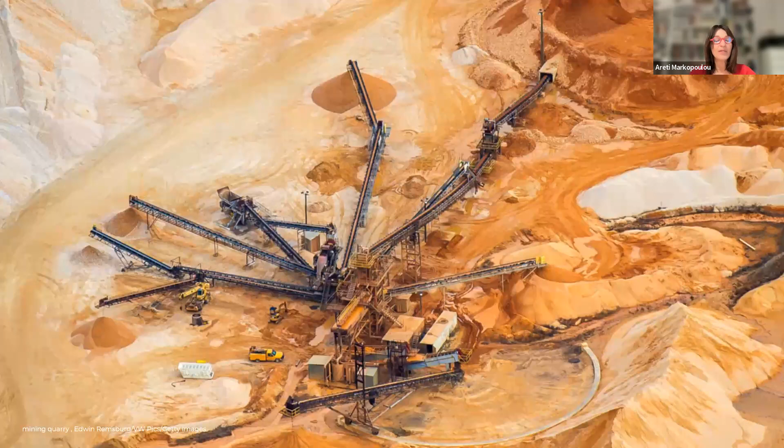Buildings are responsible for half of the global primary material consumption, while they're accountable for almost 40% of global climate emissions, of which half are produced during construction. So although our contemporary practices and policies primarily focus on optimum sustainable buildings that are low in energy consumption and low in CO2 emissions during their operation, we start to realize that the biggest challenge lies in decreasing the embodied carbon of the building industry.

Just to clarify some concepts and relate them with the types of carbon in buildings and the environmental impact, it's important to mention that embodied carbon is the carbon dioxide emissions associated with materials and construction processes throughout the whole life cycle of a building or infrastructure. It includes any CO2 created during the manufacturing of building materials—material extraction, transport to manufacturer, manufacturing—plus transport of materials to the job site and construction practices used. Put simply, embodied carbon is the carbon footprint of a building before it becomes operational, and it also refers to the CO2 produced maintaining the building and eventually demolishing it, transporting the waste, and recycling it.

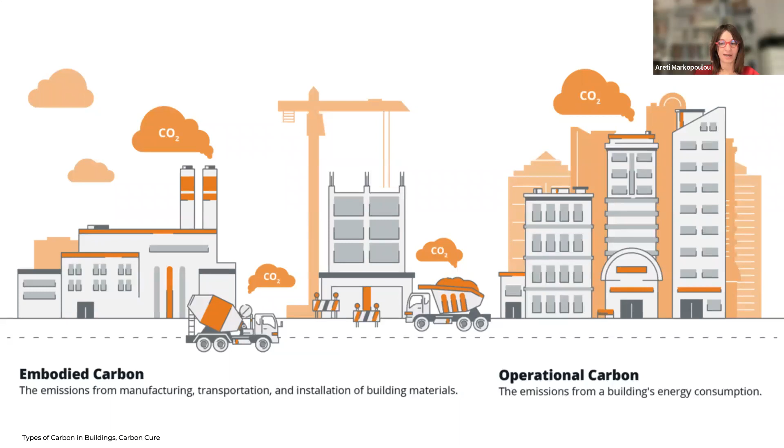Recent data from the World Green Building Council indicates that embodied carbon is becoming a larger portion of a building's overall carbon footprint. If you're interested, you can find more detailed data in the Advancing Net Zero project, a report produced in partnership with the European Climate Foundation, C40 Cities, and Ramboll. The report focuses on embodied carbon and emissions as part of a whole life cycle approach, and through its results it urges systemic changes needed to achieve full decarbonization across the global building sector.

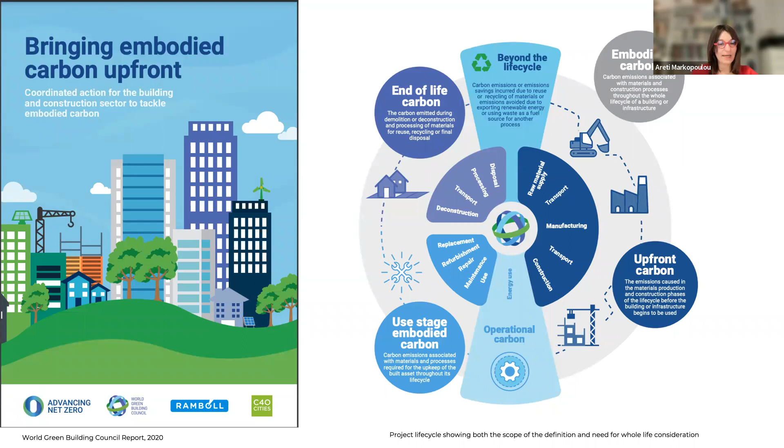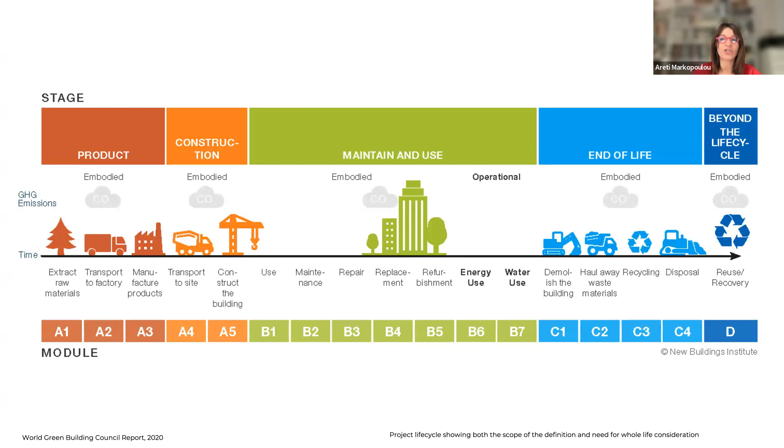Although the increasing need for buildings to accommodate population growth is a fact accepted by every government, industry, and stakeholder, there are still no industry standards, no building certification programs, no public policies or building codes, and no widely used, transparent, publicly available methods or tools for measuring embodied carbon. So key point number one: embodied carbon emissions associated with the production of building materials, construction activities, and end of life—shown here as the orange and blue part of the diagram—become the biggest challenge to respond to, compared to operational carbon during the life of the building.

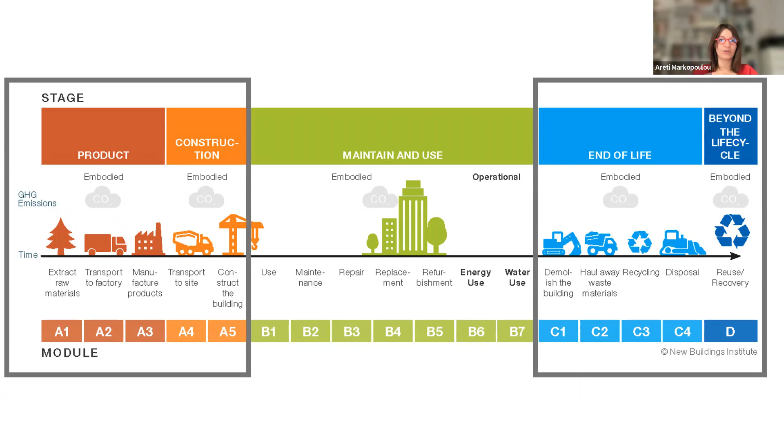A second significant key point to highlight, to contextualize what we'll be discussing today, is the impact of resource extraction that goes beyond carbon numbers. We are gobbling up the Earth's resources at an unsustainable rate. The extraction and processing of materials, fuels, and food contribute over 90% of biodiversity loss and water stress.

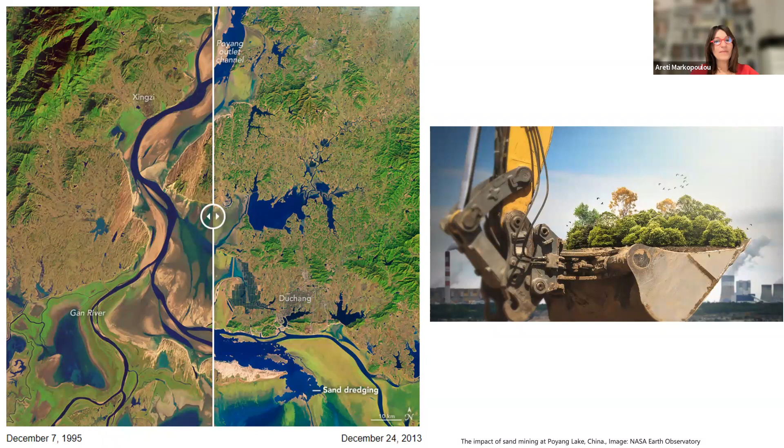This mass includes, of course, waste, and we should not forget that the building sector is one of the world's largest waste generators. Construction and demolition waste accounts for approximately 30% of all waste generated in the EU, and similar numbers are valid in other parts of the world.

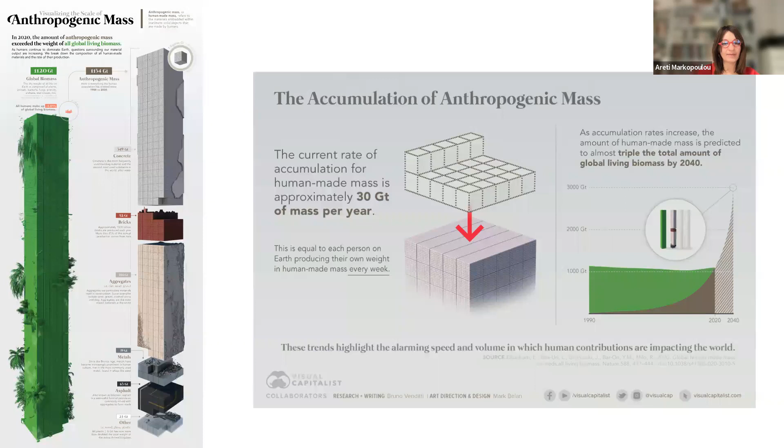So on one hand, we need to build more to respond to the current challenges of population growth—we actually reached 8 billion people just 10 days ago. On the other hand, we need to build in a way that minimizes embodied carbon and limits material extraction. So how do we do that?

It is exactly in this point that the need of rethinking resources should enter our education, should enter our design culture and our policy making for the built environment. So in our current context of hypergrowth, coupled with the climate emergency, the growing rate of urbanization and the increasing social and even political awareness on the matters of the Anthropocene, the topics of resource depletion or insufficiency need to be reframed. A proposal related to our work that we're developing at IAAC in Barcelona is to operate with an abundance mindset rather than from a place of scarcity. So this is a new paradigm that I want to introduce.

It's especially relevant in the practices related to the design and the production of the built environment, since it expands the definition of resources and, of course, where resources, raw and non-raw materials can be found, and where these raw and non-raw materials can be mined. So if, as agents involved in the design, in the planning and the construction process, we could shift the attention to the anthroposphere as a source of, rather than just a destination for processed goods, then we might have the potential to disrupt linear patterns of design and enhance circularity in cities and the built environment.

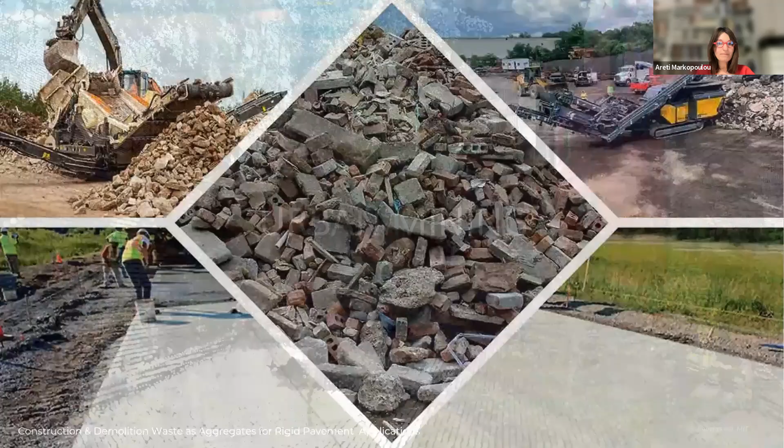Now, current urban mining practices and policies for construction are primarily focusing on reusing construction and demolition waste by downcycling them. So the majority of demolition waste, for instance, is used as filler when building roadways, and this downcycling prevents the further reuse or the further recycling of matter.

There is also very little research on how construction and demolition waste can be reused as primary materials in new building construction. And this is due to the lack of building information on the amount, on the state, on the reuse possibility of the existing building material stock.

So the current urban mining initiatives for building materials and components reuse rely mainly on expert survey and analysis of field data in conjunction with other relevant census or cadastral data sources from public building registers.

However, on the one hand, public building data lack key information on materials, and on the other, the need for extensive prior field research results in a process that requires high cost and sophisticated equipment, making it difficult to implement in low budgeted administrations or in countries where extensive public open data is not available. So developing quick, feasible, and replicable methods to create inventory of existing building stock reuse through automating the expert field audit and the inspections is a key research field that requires further exploration.

Here I want to showcase two projects that operate in two different scales for monitoring and automating the indexing of material stock in the built environment. So the projects are complementary and they provide useful insights on the potential of the use of technologies such as artificial intelligence, computer vision, 3D scanning, and robotics for enhancing data sets on the existing building material stock.

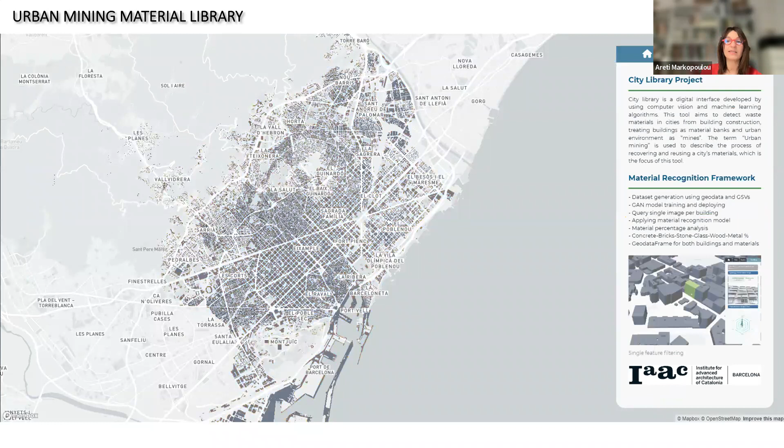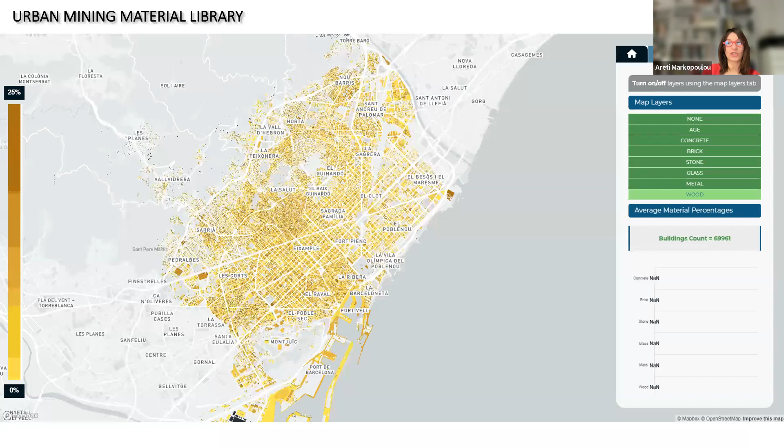Starting with the urban scale, this is a project called Urban Mining Material Library. It has been developed with a group of students and researchers in the City and Technology program at IAAC. The project proposes an end-to-end process for an integrated web-based application which encloses and delivers cross-referenced data about a city's material stock.

The process consists in combining image-based segmentation with cadastral data in a GIS database. It uses unstructured data from open street view imagery to identify relevant patterns for making estimations of the quantity, state, and projected availability cycle of concrete, brick, stone, metal, timber, and glass in building facades.

We use computer vision and machine learning to train an algorithm that, using millions of open access images, can create a platform allowing us to identify what kind of materials we can find in the buildings in our cities.

By applying predictive modeling at the city scale, the algorithm is able to identify, geolocate, and even quantify facade materials with a present accuracy of approximately 87%.

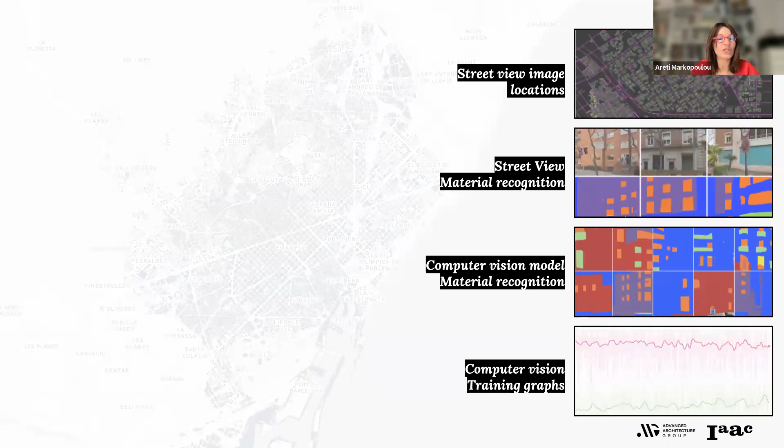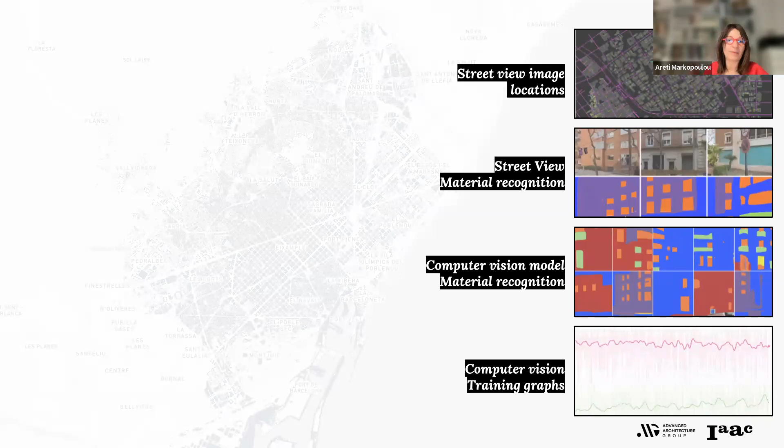The value of this study does not lie in achieving 100% accuracy. It actually lies in the use of open and unstructured data as a basis, and this use of unstructured data makes the platform highly repeatable and expandable. It attempts to propose a solution that crosses the boundaries of the original case study, and it can democratize access to data for local decision makers in different parts of the world, especially in countries where open public information is less accessible.

When tasked with mapping material availability at urban scale, it becomes immediately apparent that facade information alone suffers from a narrow understanding of the quantities and types of material. For example, wood is not a predominant facade finishing material, but it appears in large quantities in structural and non-structural components throughout the building.

So it becomes crucial to overlap image comprehension and the algorithm's training with existing cadastral data about buildings, such as year of construction, building height, or land use, among other data. For instance, when identifying and indexing concrete buildings, we observe that the year of construction and the height of the building can be better indicators of understanding whether the building is made out of precast concrete panels.

The algorithm can tell us that a building is made of concrete, but whether it's precast concrete panels or not is something we can extract as knowledge by overlapping the specificities of the buildings. For example, if we use the data on the percentage of glass as a filtering element, we are able to start excluding buildings whose structure is probably built on steel frames.

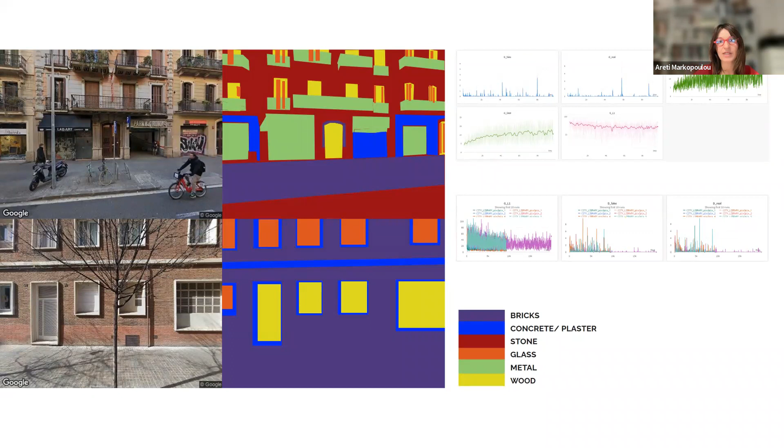This multifaceted work of using algorithms and machine learning while overlapping big data on building characteristics becomes a very important new process for identifying the existing building material stock.

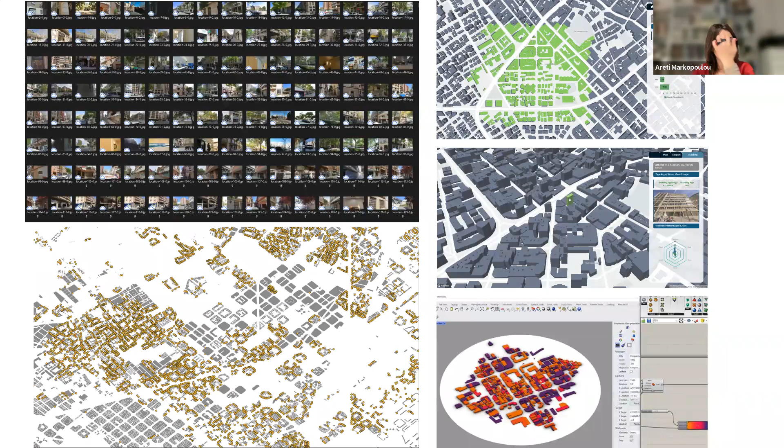An important aspect of this project, besides its technical development, lies in the creation of a web-based interface. This was a clear goal for us from the beginning, and we created a lightweight online environment with a variety of functionalities, including a user interface for data visualization, search boxes, a media library, material charts, building material versus Google Street View imagery visualization, and, most importantly, data export.

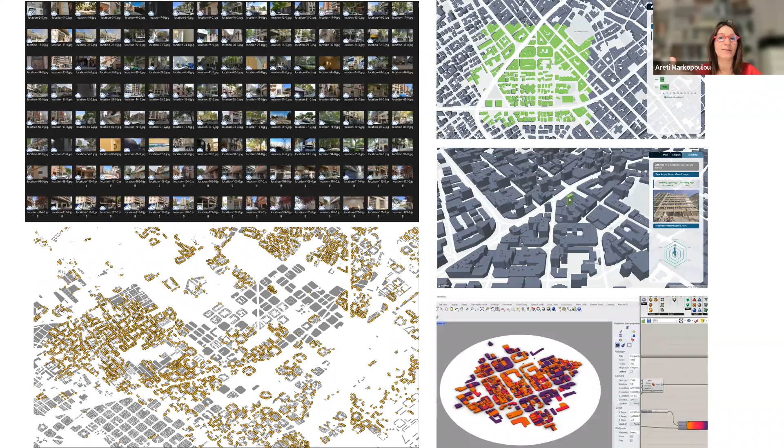The goal of the interface is to be usable by different stakeholders, including decision makers and other urban agents who participate in the formulation and planning of urban material reuse strategies.

A final important aspect—this is a video, I don't know if it plays... yeah.

A final important aspect to highlight is that the current study contributes to creating material databases of the entire stock of existing buildings, beyond just the analysis of buildings planned to be demolished.

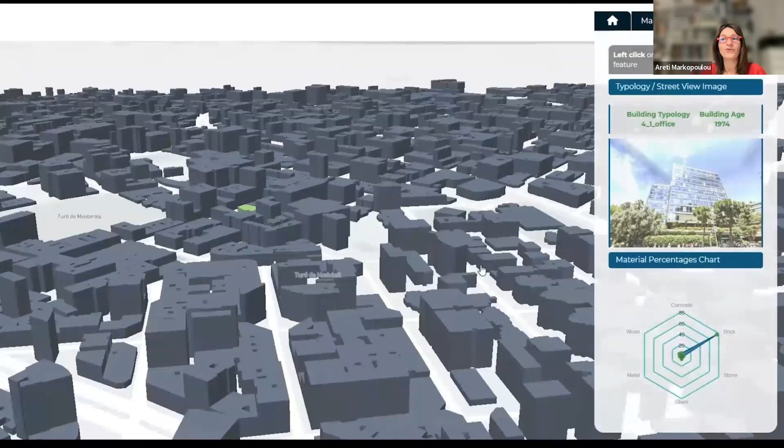Why is this important? In the field of urban policies, most efforts to achieve cities' goals for reducing consumption of primary materials focus on matching demolition and construction material flows—trying to find a balance between yearly demolition and construction material demand.

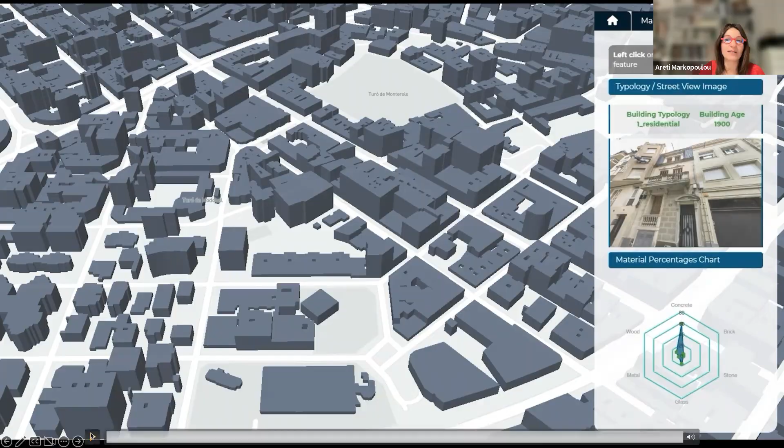Although such scenarios could be ideal for cities, and while recycling of demolition waste has a sizable potential, the reality is that in many urban environments—including cities like Amsterdam, a pioneer that invests heavily in circular economy—even there, the potential falls short of achieving the policy goals required for reducing primary material consumption, as set forth by the 2016 Paris Agreement.

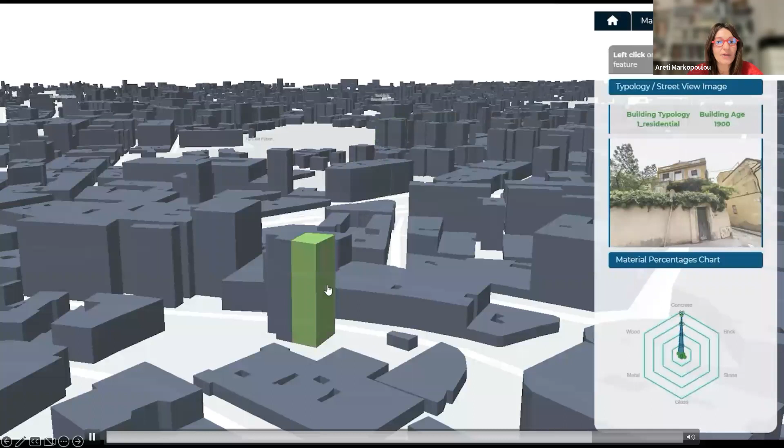Being able to acquire building information data of the entire building stock becomes significant for contributing to the formulation of long-term urban policies and planning strategies for building reuse that tackle issues of mismatch between annual demolition and construction material provision and demand. The technique can be upscaled and applied in different territories where data on the built environment is scarce, allowing stakeholders such as planning experts or construction companies to make more informed decisions towards the reuse of building and demolition waste.

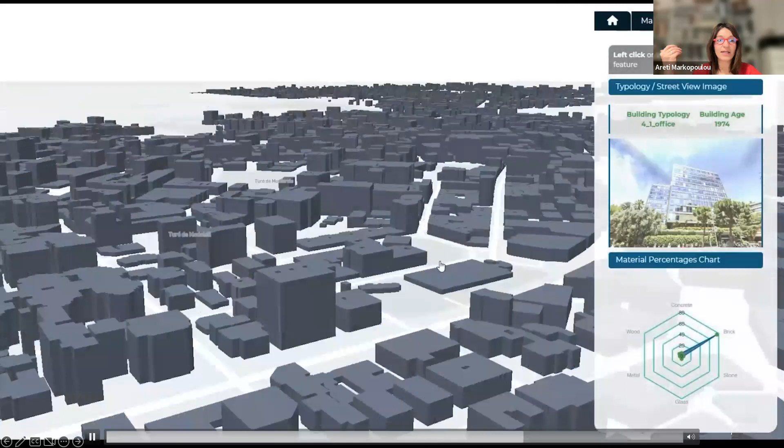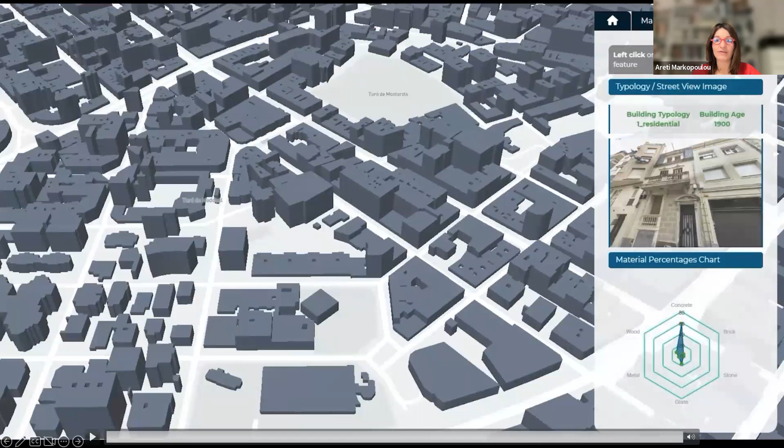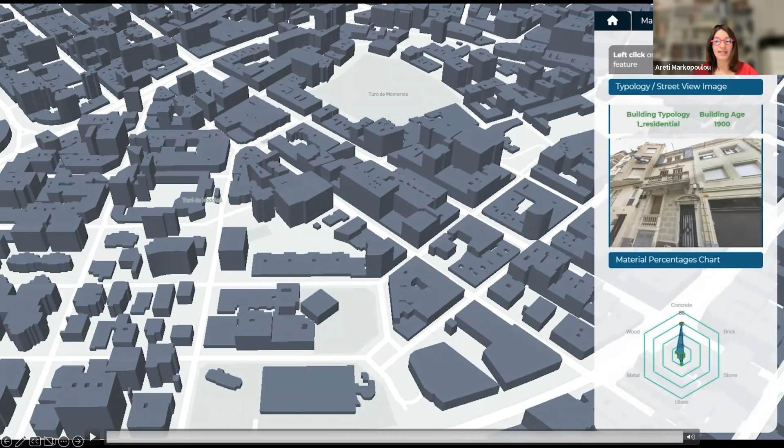The technique and results of the study can also become data sources for existing digital reused material marketplaces, which offer upcycled materials coming from demolition waste as potential material for new construction. With a tool like this, we can feed these digital marketplaces, contributing to matching offer and demand within proximity geolocations—not only using upcycled materials, but identifying which is closer to your construction site, maximizing the values of the circular and local economy.

Complementary to this urban scale identification of material stock, data about the specifications of the material—including dimensions, state, properties, or geolocation—becomes highly relevant for the potential of reuse. So not only identifying where materials are at the urban scale, but also what is the state of that material and its exact dimension. The creation of a parallel digital layer to enable mining and define the specific reuse of otherwise purely physical construction and demolition materials is of big importance in this context.

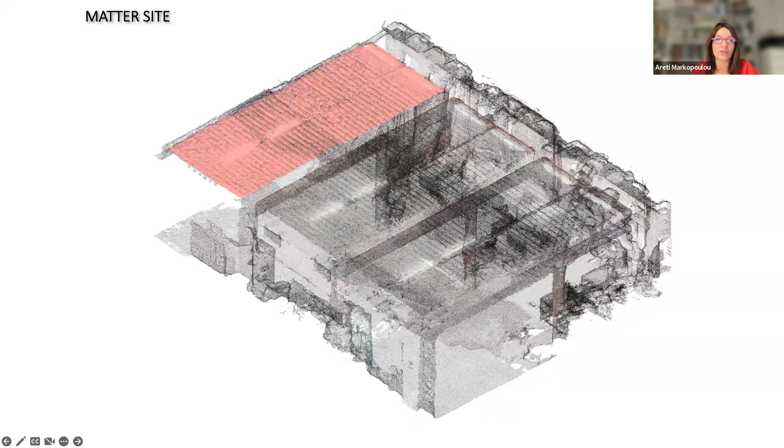One of the research lines of the Masters in Advanced Robotics and Construction at IAAC explores the possible use of aerial and ground robots coupled with computer vision for scanning, sorting, and digitally archiving existing material stock in buildings. This project started by a group of faculty and students, and it's now a successful startup for the construction industry.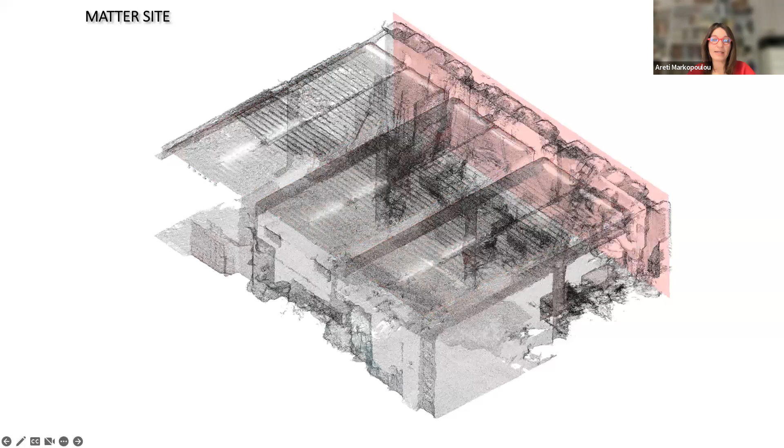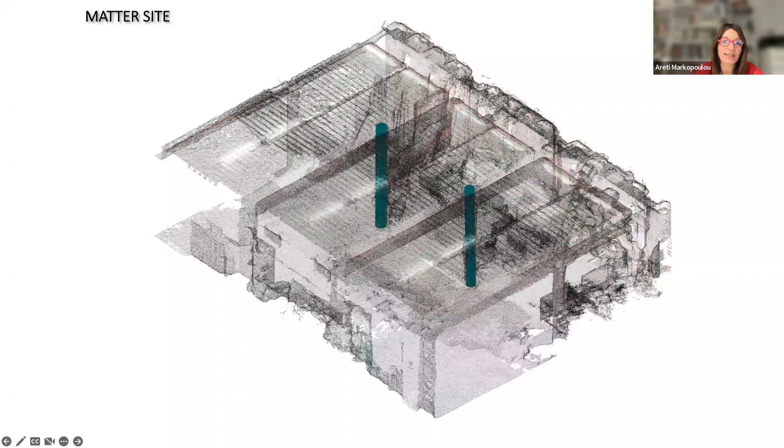The research aims to employ an automated digitization method for the near end-of-life stage of a building, considering it as a source of high-value assets. To encourage the use of valuable secondary sources of materials and to better inform early design choices when reusing construction waste, the resulting data set is distributed to designers and builders.

The first part of the research uses drone photos and computer vision to automatically identify building materials and components at pre-demolition sites, contributing to the creation of an analytical and logistic support system that can be used to define optimum deconstruction and reuse strategies in terms of environmental and economic sustainability criteria.

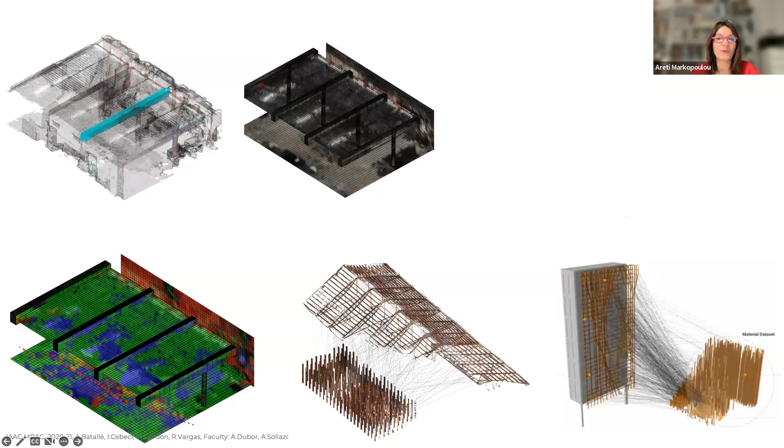The project contributes to the creation of a toolbox for quantifying, geolocating, indexing, and assessing the state of materials and their potential for reuse in existing buildings. What is the dimension of a window or a timber beam? What is its state? Can it be used without processing, or what kind of process is needed in order to bring it to a state ready to be used for construction?

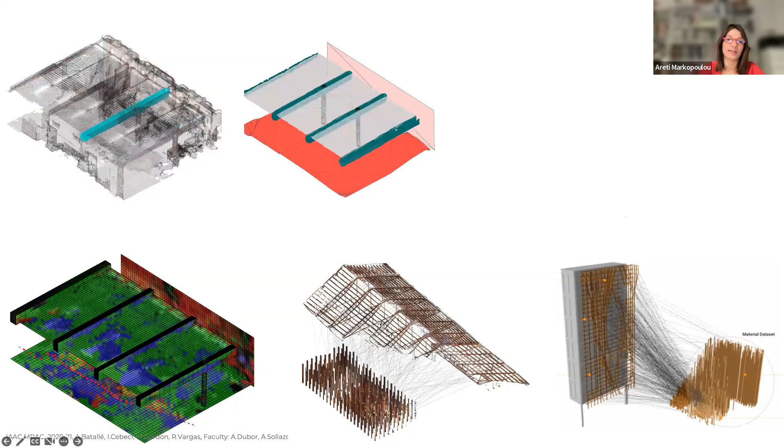In the tool, there are two types of data sets: one related to data scanned in the pre-demolition phase, and a second related to the post-demolition phase—what can we find there, what is its state, and how can it be reused? Once these data sets are processed through computation and machine learning, we are able to create categories of different building elements and materials, such as concrete blocks, wooden beams, or brick walls, and how these could be reused in another building in the future.

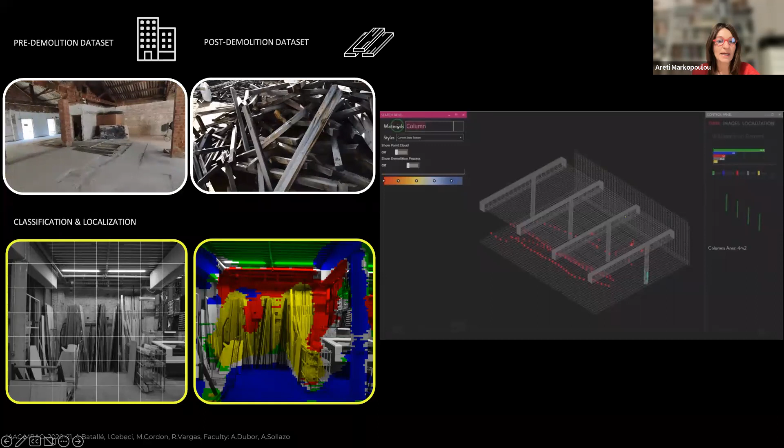The three important steps of this process include building inspection with aerial robots and computer vision, the classification and localization of the material stock using machine learning algorithms, and finally, geometry reconstruction based on the typology of the classification and localization dataset.

The second section of the study aims to transfer the previous database to as many stakeholders as possible related to the construction sector. In order to impact design and construction, it is imperative to match offer and demand. So a computational design tool is incorporated into existing construction software in order to offer recommendations for design adjustments from the very early design stages.

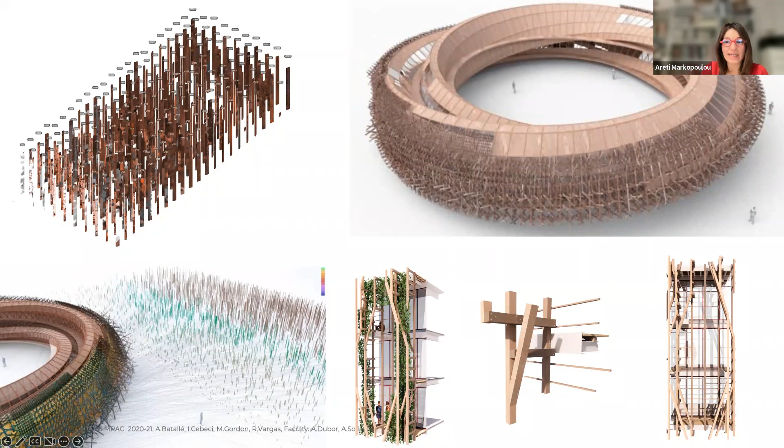The suggested system additionally offers recommendations for matching specified design components with materials previously identified as available resources. While some questions related to the cost of reuse versus the cost of using new resources in construction are still to be answered, what is important is to understand that such processes and techniques facilitate the implementation of the concept of material passports for buildings, which encapsulate many of the necessary criteria to support reuse.

The significance of material passports for the implementation of the circular economy in the construction sector calls for new policies that regulate the documentation submitted for new constructions. We need to introduce new evaluation criteria that we can set up for buildings beyond the existing required energy certificates, such as, for example, the LEED certificates.

For new buildings, design should go beyond the project handover stage, and it should include strategic planning for the material sourcing, for the assembly, for the dismantling, for the reprocessing, and for storing before a new use cycle. At the same time, reality scanning and computer vision provide the opportunity to include existing building stock in such policies and to compile its material passport retroactively.

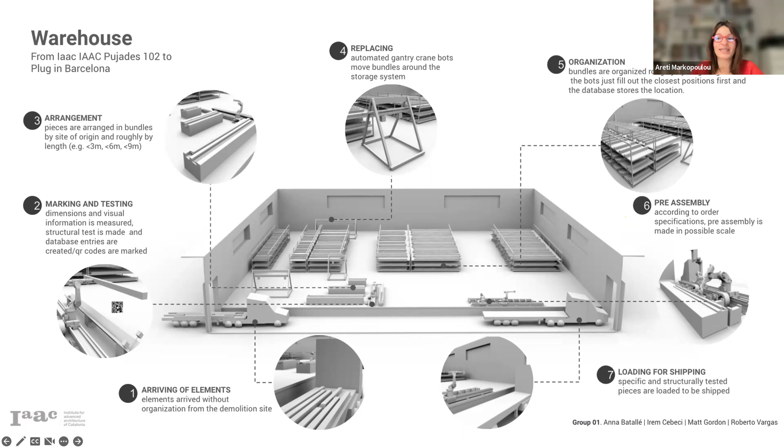We need to have a new infrastructure of hubs in the city where sorting takes place, and necessary processes for conditioning some of these components take place, etc. It's very interesting that we start to understand not only the technical, but also the spatial impact of the implementation of circular economy in the built environment.

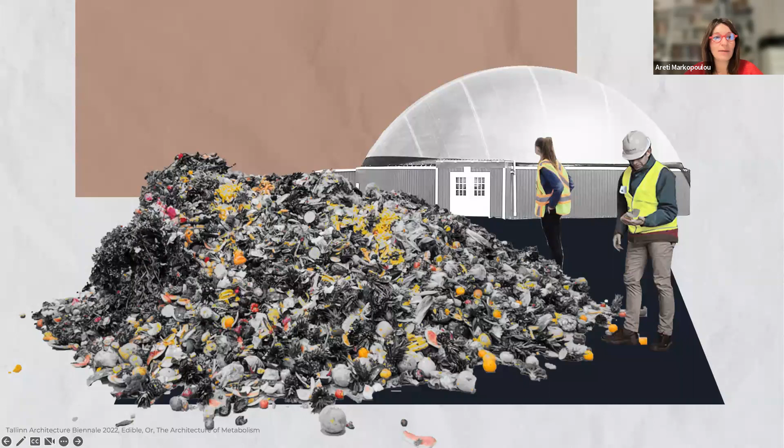Beyond existing building stock or demolition waste that can be indexed, assessed, processed and used for new construction, we should not underestimate the potential of identifying other urban waste streams that could become new resources for construction. There are different types of urban or agricultural waste, for instance, that have the potential to become a new class of sustainable building composites through different processes that enhance their properties in order to match them with the building industry needs.

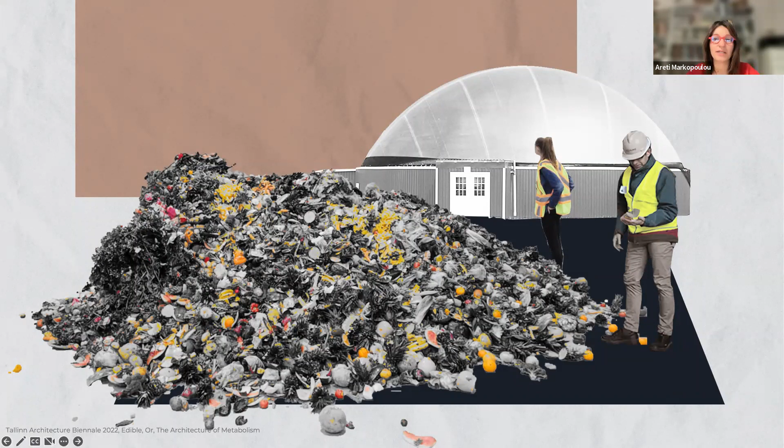This is the scope of the research of the Digital Matter studio at IAAC, and it explores waste streams, experimenting with upcycling waste and how this waste could be appropriated for building components for different architectural features.

One of the case studies researches the production of value-added building composites using agricultural waste and food processing side streams, specifically in this case, barley straw. The use of barley straw in construction is not new, but the construction industry has neglected this resource since there are numerous limitations on achieving surface and geometry variations, and limitations on scaling up without the need for secondary structures.

So the specific research focuses on overcoming current limitations in surface and geometry manipulation by introducing new additives and digital manufacturing techniques. The goal is to create a double curved, self-standing building skin that would allow for much more complex, geometrically rich and aesthetically rich outcomes.

The composites explored include a variety of performances. For instance, hydrophobicity is achieved by integrating natural resins and natural oils into the material system, making it appropriate for outdoor applications. On the other hand, numerically controlled cutting surface subtraction is being used so that different textured surfaces could emerge, providing humidity control and aesthetic richness.

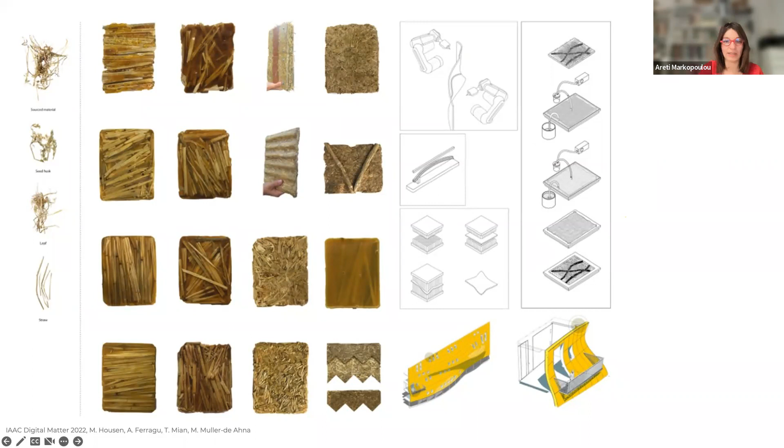In this case, we have been working in Barcelona with a group of students and researchers in our Digital Matter studio, and the goal was to identify waste streams as close as possible to where we are. The waste material is sourced by identifying agricultural areas that can provide barley straw within a maximum distance of 30 kilometers from the center of Barcelona.

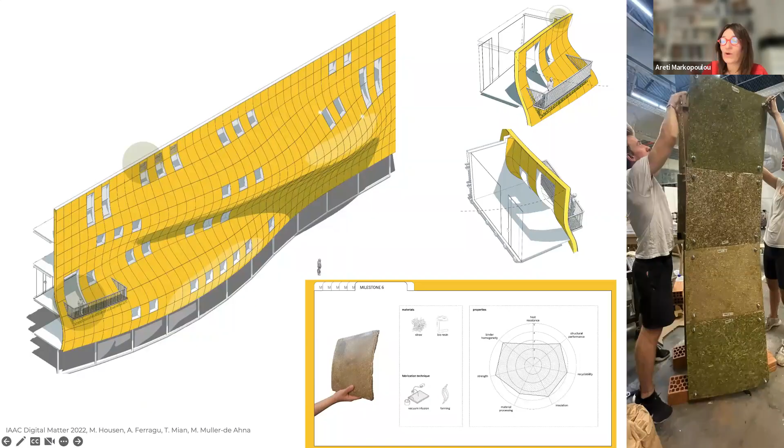So the creation of double-curved self-standing building elements have been tested for implementation in building schemes, with some prototypes that allowed us to understand what is feasible and what is not. This opens up possibilities to rethink the use of barley in construction in terms of complex geometries, and adds value to contemporary examples of straw design proposals, such as the Malawi School by Nudes.

Other examples that follow similar logics and material protocols include the creation of a cork-based and mycelium composite that uses the waste stream of the active cork industry in Spain and Portugal. You might not know, but approximately half of all cork products are estimated to end up in landfills at the end of their useful life, while the other half is downcycled or used in biomass processes for clean energy generation.

Taking into consideration that cork is a lightweight material with exceptional acoustic and thermal insulation properties, it's considered an important natural alternative for architectural applications. As cork is an appropriate medium for mycelium growth, the prototypes combine cork waste in the form of granular cork or even cork stoppers, and mycelium, to create acoustic insulation products for urban application and construction.

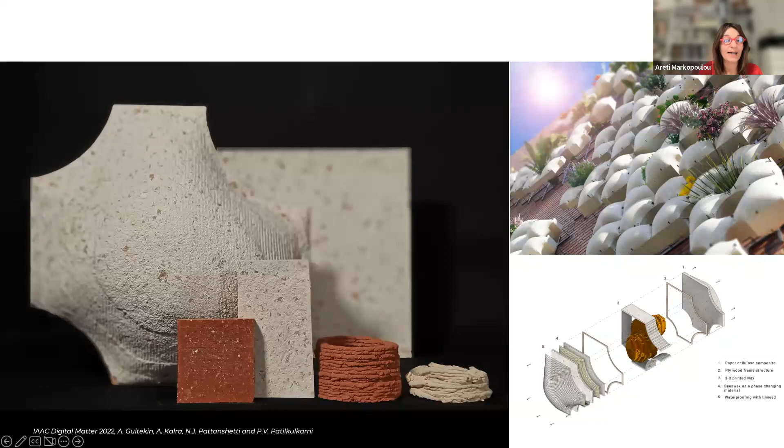In this case, we have experimented on how we can create temporary building skin components with the goal of enhancing biodiversity in cities, specifically protecting pollinators and creating pollinating corridors using the building facades, with material that creates the appropriate conditions for bees or other pollinators to live there—to create a habitat for other species that can co-inhabit the built environment together with humans.

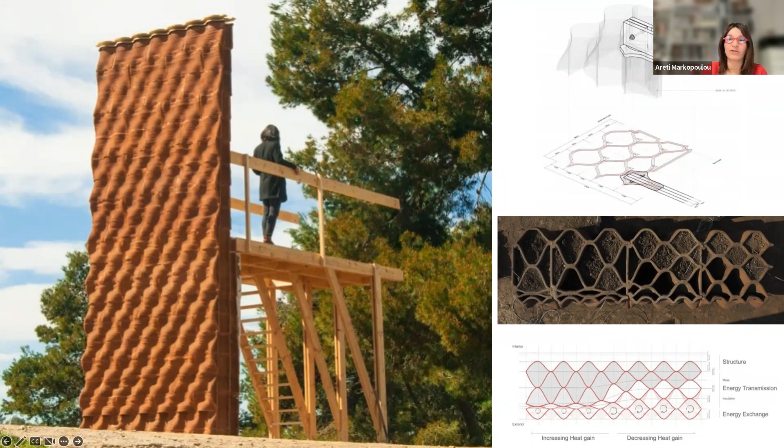Of course, earth is another material that is abundant. It can be found in all construction sites and locations. As you may know, for many years now we have been experimenting at IAAC on 3D printing earth-based buildings, with the goal to create low-cost, negative carbon, aesthetically rich buildings, whose material components can be mined and reused in other constructions when their lifespan is over.

This is basically possible because the earth-based material we developed in our 3D printing architecture program is enhanced with bioadditives and requires no firing. So up to 99% of the materials used in our custom earth mix can be found locally in the soil below or around the construction, while additional materials for further construction, such as timber or bamboo, can also be sourced locally.

A few weeks ago, we just completed a bigger prototype, the TOVA prototype of a small housing cabin. And since the earth mix requires no firing, it also means that once you build a prototype or a housing and its lifespan is over, you can reuse the material to construct another one.

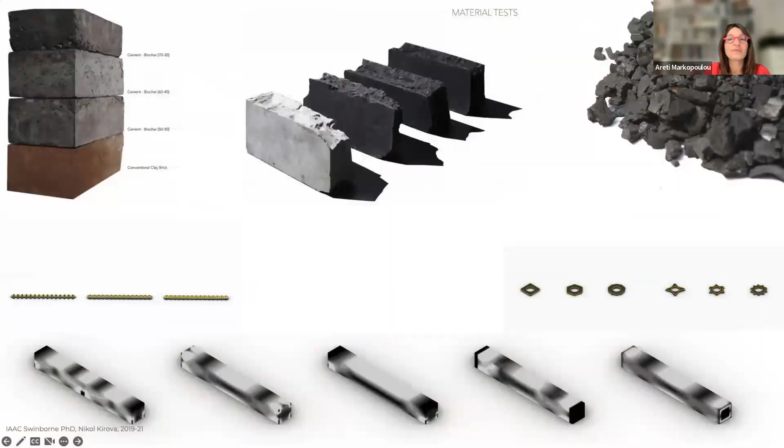Within the waste stream of urban agriculture, we can also highlight biochar. Biochar is the byproduct of the pyrolysis of organic and agricultural waste. So in principle, we are talking about a solid material that is mainly sequestrated carbon. At IAAC, we're working on creating biochar concrete composites with the goal to minimize the embodied carbon in buildings, and to start changing our mindset towards designing buildings that are not just zero carbon, but negative carbon. We have been working on different kinds of architectural elements.

What is very interesting with the use of biochar is the fact that it's a great fertilizer. Currently, it is used in the agricultural industry as a fertilizer. So once the lifespan of a project or building composed of this material is over, we can separate the parts that correspond to biochar.

We can send it back to the soil, and it can fertilize it to continuously produce, for instance, agricultural projects. So this kind of building practice can mark a shift in the way we construct, aiming for the creation of negative carbon buildings that after their life cycle can go back to soil, becoming new nutrients for a new metabolism.

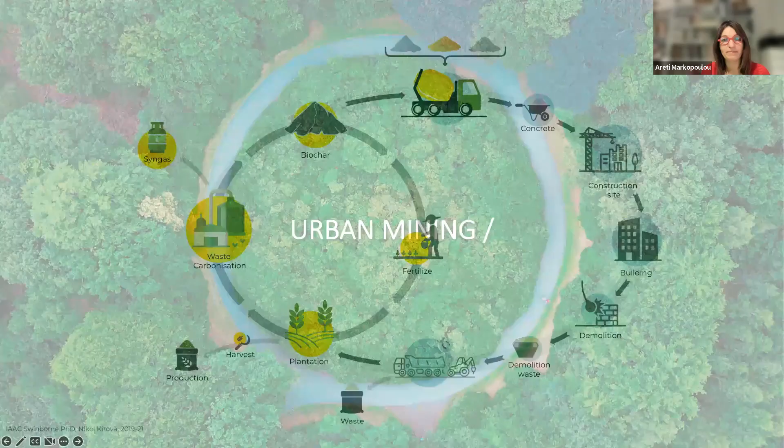Now, as I said in my introduction, urban mining and resource reuse from our existing building stock or from existing waste streams in cities is one of the key strategies to achieve a paradigm shift in design and construction towards abundance. All agents involved in design, planning, and construction are called to shift our focus to the anthroposphere as a source of, not just a destination for, processed goods. The concept of urban mining is revisited to manage the material stock in urban systems and the use of anthropogenic resources in new production cycles.

So, from enhancing building data sets at urban and building scales, as we have seen with the examples I have shown, to introducing waste streams as new construction materials, the outcome of this work challenges the foundation of our material practices, and it presents the potential to disrupt the linear patterns of design and the linear patterns of making.

Now, the second strategy, which is equally significant for implementing a paradigm of abundance versus one of scarcity, is resource production in cities. This is very obvious and very direct. While urban mining expands the definition of resources and where these can be found and mined...

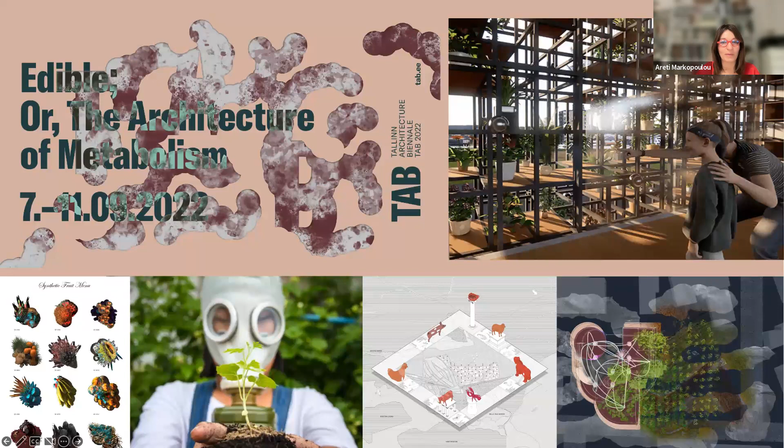The main exhibition and the parallel events of the Biennale addressed the question of where our food comes from as a creative design problem. It tackled issues of the aesthetic, cultural, and experiential qualities of spaces as productive environments throughout their full life cycles.

So while most of the discussion today, especially in our disciplines of design and construction, revolves around energy, we wanted to put forward the topic of food as a key resource that is not only contributing to our current environmental impact, but is also entangled with larger ecosystemic practices. That includes biodiversity, such as flora and fauna. It includes microclimate creation, health, air and soil contamination, or even multi-species alliances, among others.

Actually, Tongji University and Philippe Yuan, with a team of students, were part of the featured work, with a great contribution on reimagining a new future food deal for the Chinese periphery. So, how different means and technologies could allow us to rethink our territories, our buildings, our public spaces as productive places for resources such as food.

Now for Edible, what we did on one hand is explore food and architectural strategies of local production and self-sufficiency. For example, urban farming, renewable energy, or zero food mile practices that reconnect communities via food. On the other hand, we analyzed the byproducts of urban life, such as livestock, agriculture, and forest waste, as resources in ways that limit material loss and explore alternative pathways.

So such an approach allows designers to transfer the metabolism and experiential aptitudes that we can find in the natural world, such as the concepts of growth, decay, digestion, or even nutrient release, and move these aptitudes of the natural world to the domain of cities and buildings.

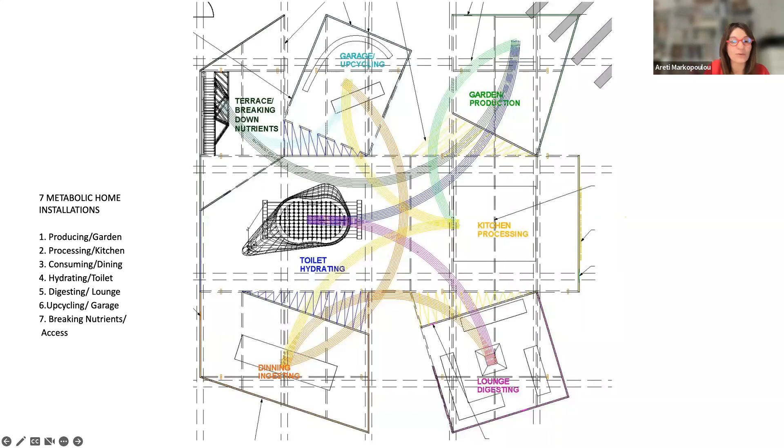So one of the main sections of the exhibition was the Metabolic Home. Each of the 7 installations in the Metabolic Home exhibited how metabolic processes related to food could eventually be linked to everyday domestic spaces and activities, and what that would mean for the way that we inhabit and coexist with these systems.

Food production as a process has been presented in a vertical robotic garden. That was a project we produced at IAAC, and it seeks to promote a productive built environment where co-symbiosis among humans, machines, vegetables, and animals becomes fundamental for surviving.

This project is part of a series of research projects we are developing at IAAC, focused on implementing nature-based solutions in buildings and public spaces with the goal to enhance productivity, include society, and decarbonize the built environment.

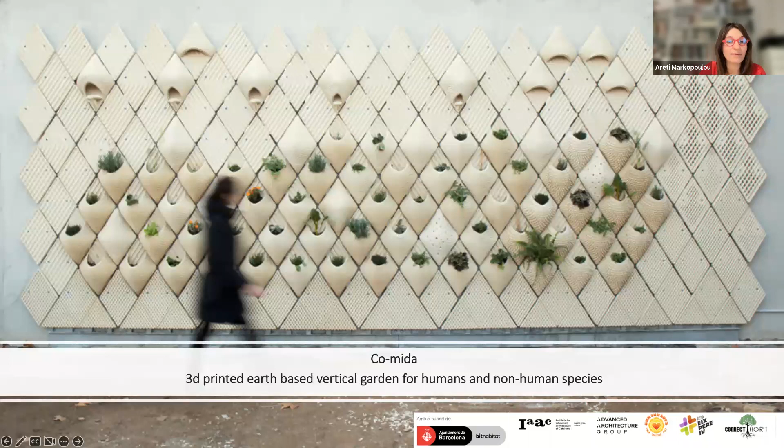So on the screen, you can see a 3D printed vertical wall that can serve as a farm for the communities. It is implemented in a public space in Barcelona.

It uses 3D printing and computational design to create different textures and customized components so we can control humidity, allow moss to grow, and protect different edibles from sun or increase their exposure to sun. We can use typologies of design to create components that include the growth of edibles, but also components that become bird houses, insect hotels, etc.

Some close-ups of this project, and this is the last project, very similar to the one I've shown, that has been presented at the Smart City Expo just two weeks ago, exploring similar logics with different design outcomes.

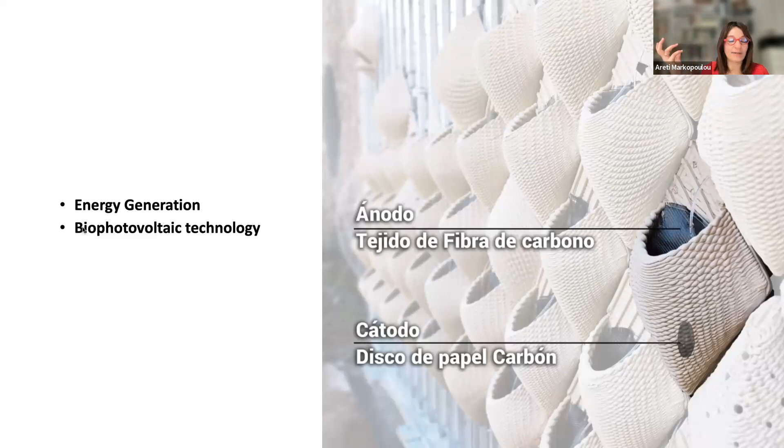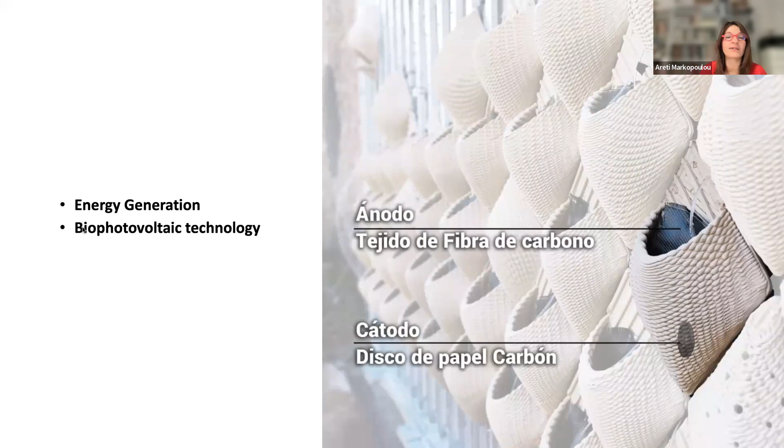One of the most important things of these productive spaces in cities is that, on the one hand, we're able to produce the resource of food, but with the use of biophotovoltaic technology, we're also able to generate energy—not as much as a photovoltaic panel could provide, but through the photosynthetic activity of the plants, enough energy to self-illuminate our installations and vertical farms, or even to self-sustain the irrigation system and the monitoring system through humidity sensors.

The different textures allow different kinds of growth. We have implemented that into a public urban orchard in Barcelona, through a co-design process with the community.

One significant part of these processes is understanding that when you want to create architecture that offers back to the community different resources, the community needs to be involved, because we're not discussing buildings that require maintenance anymore—we discuss productive spaces that require care. So we shift the notion of maintenance towards the notion of care, and we need communities involved in the production cycles of these productive spaces.

So for Tallinn, representing the production of food in the metabolic home, we wanted to create a new type of farm that explores the transformation of building skins into vertical urban orchards. Edibles are grown in the building facade and maintained by both inhabitants and intelligent robots.

Those robots can scan the levels of nutrients on the roots or the humidity in the soil. They can make sure irrigation or nutrient feeding happens exactly where and when needed.

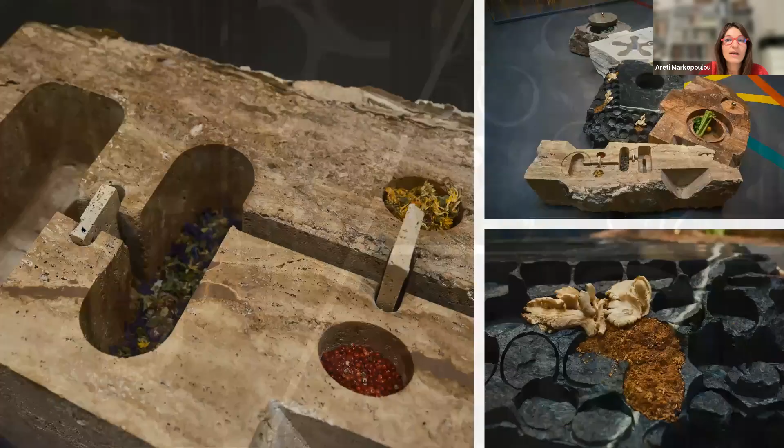Within the metabolic home, the processing of food has been presented through an interspecies kitchen by Andrés Jaque and the Office for Political Innovation. Using abandoned stones from a mine, the project presents a kitchen where microbes, enzymes, and byproducts of organic processes such as fermentation present a new way of recirculating nutrients.

In the consumption part, we have presented a rewilded dining space produced by the Cooper Union, where consumption includes production on site and awareness of the origins of each ingredient that reaches our table.

In the digestion part, which happens in a lounge of our metabolic home, we see a series of building skin elements whose outer envelope is edible. Here, Terreform ONE with Mitchell Joachim and Vivian Kwok use puffed rice to produce building tile components that can serve as a food emergency stock, while at the same time vastly increasing biodiversity by offering food to insects, birds, and other small mammals.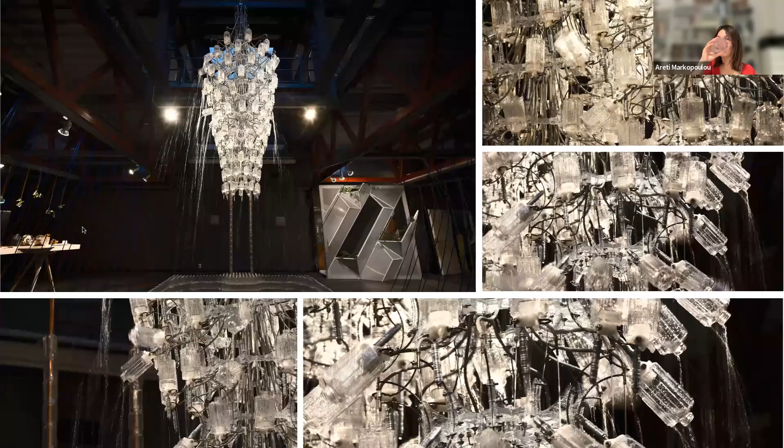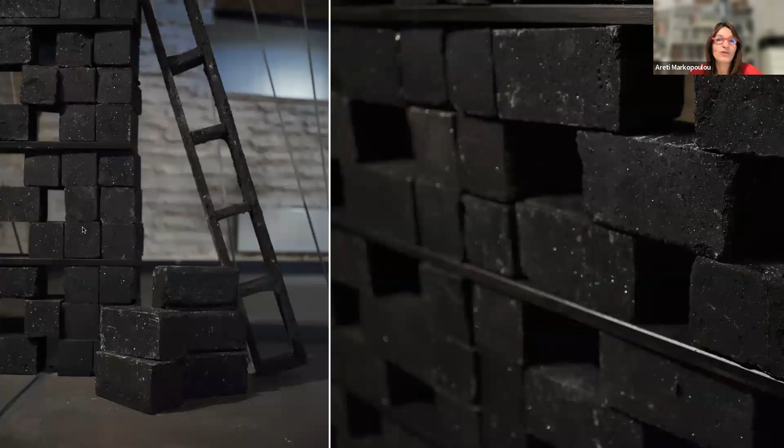So hydration of food happens in a toilet that endlessly recirculates and filters water. Nutrient release happens in a vertical connection for harvesting. And upcycling food is presented in a garage, which is made of carbon negative voxels.

Here, the team of Made of Air, led by Allison Dring, presents Rock Bottom, an installation that becomes an open laboratory for creating new carbon negative materials for construction, emerging out of agricultural waste and the use of biochar. So each domestic space of this metabolic home is part of a larger domestic ecosystem, interacting with the other installation, the house parts, in a feedback chain of resource exchanges.

Now, what becomes evident through this work is that envisioning, experimenting, and implementing architectural spaces that produce resources, that digest their waste, that decompose, radically intervenes and makes us rethink the extractive, consumptive, and contaminating logic and processes of the built environment.

So within the context of our current interconnected global crisis today - the climate emergency, public health, social inequity - the idea of a world where resources are produced locally and recirculated is not just a great idea, but a necessity. It is an urgency since it is actually vital for planetary habitability.

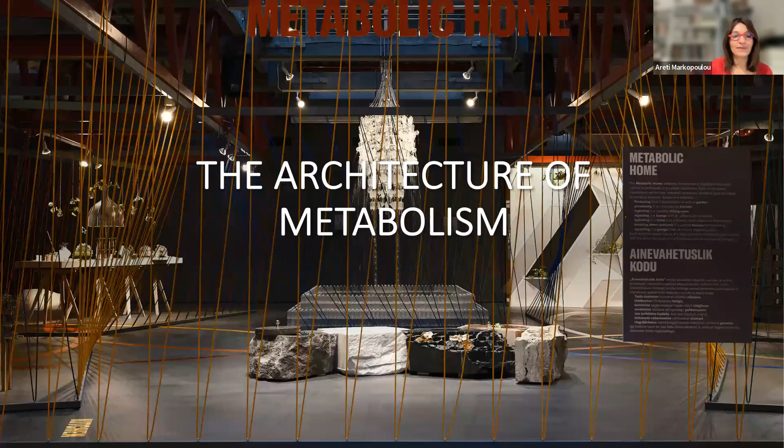So the metabolic home is a digestive system that receives human output and waste in its multiple forms, and converts it to various usable forms. This portrayal of the home urges viewers to look at our debris, our waste of our own production processes, and the interrelated social problems linked to the production and transportation of waste in a visceral way.

On the one hand, we are the raw ecologists of our bodies, and the understanding that these problems are not simply statistical. They are not abstract, not disembodied. They cannot merely be relegated only to the management of resources, but they are landed on the bodies, or on the food we eat, the water we drink, and the air we breathe.

So the responsibility of how we deal with that productive architectural elements, the responsibility of expanding the notion of how ecology is being treated in the design and construction sector becomes very fundamental.

So moving beyond an understanding of metabolism as a collection of inhabitable machines - this is actually a reading that carries the heavy burden of modernism - we need to explore building and urban metabolism as patterns of energy and material generation and distribution within a multiverse.

This reality does not tolerate the separation of humans and non-humans. Rather, it urges the assessment of a shifting web of life and death, as well as alternative forms of matter, including non-human agents.

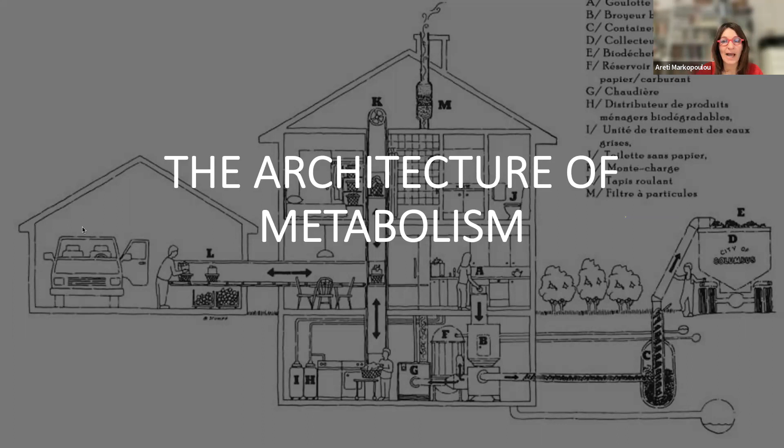At the same time, we are urged through our design actions to explore the potential of all natural and technological expressions in order to mitigate the contaminating and extracting nature of our designs and protocols that are related to the production of the built environment.

Now, when we bring resource production back in architecture and cities, we're able to understand better and participate more actively in the interdependencies among resources, production, consumption, distribution processes, human bodies, and even health.

And if we look, for example, at the current model of production, distribution, and consumption in cities - a model brought to us by the Industrial Revolution - we realize that we live dependent on an outdated production and consumption model. So we extract resources that are not abundant, we transport them to outdated factories in order to massively produce far away from where we need to consume.

Then we again transport these products to cities, we consume, we finally produce waste. And not only do we produce a huge amount of waste, but we additionally transport our waste far from where it is produced. So this linear system of take, transport, make, use, and dispose is a system that is not sustainable neither in economical nor in ecological or social terms.

So food uncertainty, the impact of the pandemic on industrial production and distribution of services and goods, the Russian war against Ukraine and the energy crisis related to this, or even events such as the blockage of the Suez Canal in March 2021 that seized global transportation of goods, creating a major impact on the international economy.

All these facts are realities that foreground the urgency for a united reflection on the fragility of our production and distribution processes, on the significance of the geolocation and mediums of such processes, meaning the significance and the acknowledgement of where things are being produced and how they reach their final destination, how they are consumed.

So we are urged for a united reflection as well on our exaggerated lifestyles that lead to ceaseless growth and endless mobility. And finally, a united reflection on our accountability for how we occupy our planet.

The aim of my contribution today, summing up, is to invite you all to reflect upon the paradigm of abundance versus scarcity. One fundamental mistake of the mainstream idea of sustainability is that we need to compromise our needs and desires. We are asked to consume less, build less, generate less emissions, move less, and so on. But the global systems in place operate in a totally different mindset: centralization, separation between waste and valuable matter, extractive approaches, and heavy carbonized production processes. So we need to ask more from architecture.